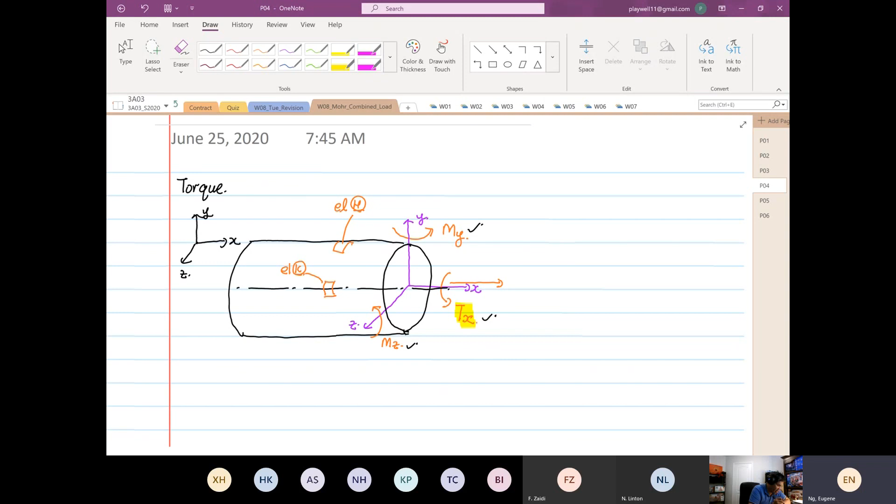So now I'm going to view our shaft from the plan view, okay. So we are going to look at X, and then we are going to look at Z. So we are going to look from the top. So this is our shaft. Right. So this will be our element H. And over here will be our element K.

And if we look at TX, okay, so this is where our TX is, right? If we look at TX from the plan view, the TX looks like this, right? If you use the right-hand rule, you look at the top, it's going down that direction.

Now, question for you. When you have a shaft under torsion, under rotation, when will the shaft break? Anyone? When will the shaft break due to torsion? Will it break during rotating, or will it break when you're trying to stop it? Anyone? When you're trying to stop it. Well done. Why? You're right. You are absolutely right.

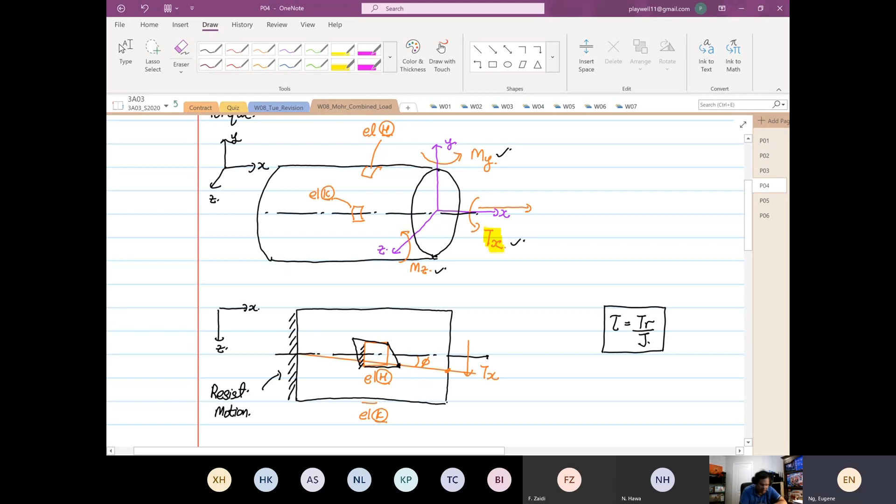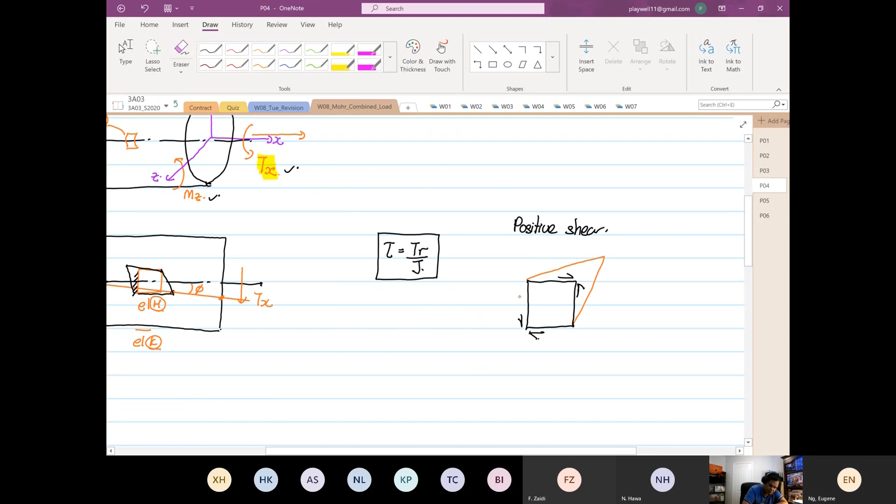So when the element is distorted that way, like what we have learned, is it positive shear or negative shear? So I'll draw for you the difference. So positive shear, right? So this is your element. So this is positive shear configuration, positive shear deformation. Then when you look at negative shear, right, the element goes opposite.

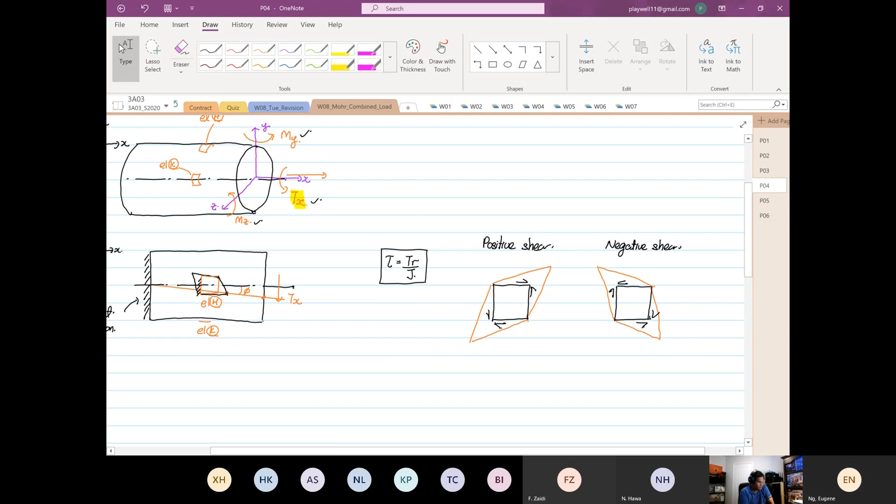So if you look at how our structure is deformed now, is it positive shear or negative shear? Anyone? It is what? So if you look at this pattern over here, this pattern I've drawn, maybe it's not very obvious. If you look at this pattern that I'm going over, it is known as what? So it's definitely not positive. So this is under what? Negative shear, right? Okay. So you look at this portion over here, it's the same, yes or no? Or the other end. So this is what we call negative shear.

Now, if you design structures that are homogeneous or isotropic, same strength in all directions, you'll be fine in terms of whether it is positive shear or negative shear; you don't really care. But if you are designing a shaft that has unidirectional strength, for example carbon fiber, it is important to know whether it is positive or negative shear.

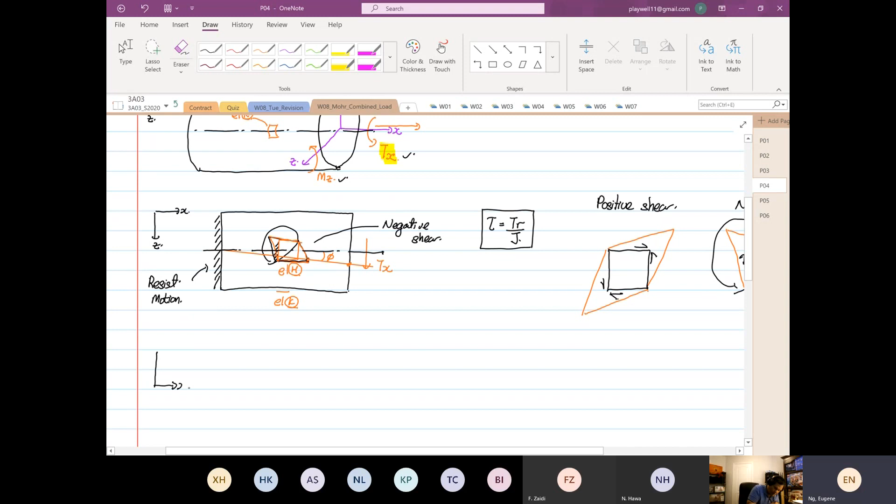So now, based on the same orientation, same applied stress, we look at this shaft now. So now we are viewing it from the top, at the plan view, to view X and Y. So now I want to see X and Y, and this is my rotation about Z now. Okay, so you still see the same thing. So now your element H is up here, and over here, this is your element K, right? And TX is still coming down.

So as I mentioned earlier, you only get stress when you resist motion, right? So if you look at how the element will deform, this part will want to come down here. So whether it is element H or element K, it is both going to be what? Negative shear. It will only become positive shear when what happens? So element H and element K will have positive shear if the torque is in the opposite direction.

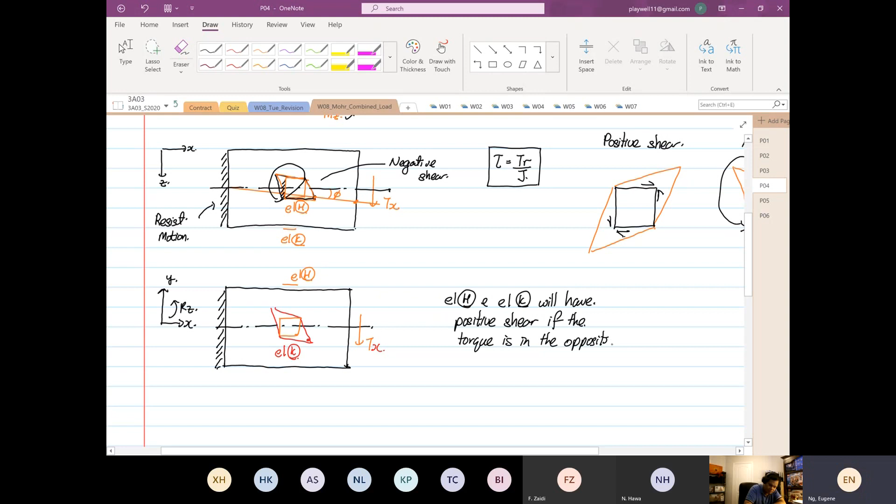So what do I mean by this? Let me elaborate. So now, again, it's been locked. This is our shaft. Now, TX goes opposite. So the deformation will look like this now. It wants to go this way now, for either element H or element K. So when that's the case, this is then classified as what? Positive shear. So that's why when we design a shaft with carbon fiber, it was meant to rotate in one direction only. If you reverse the direction, the strength is no more the same. So that is what you see when you design shafts.

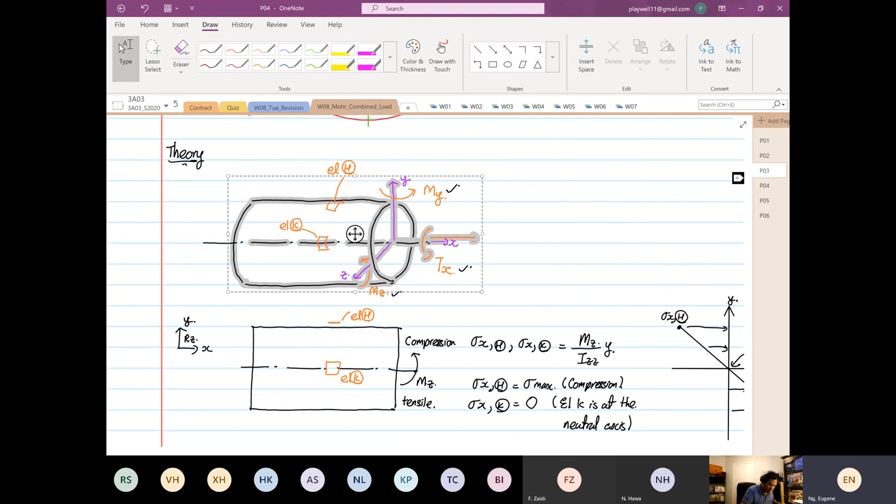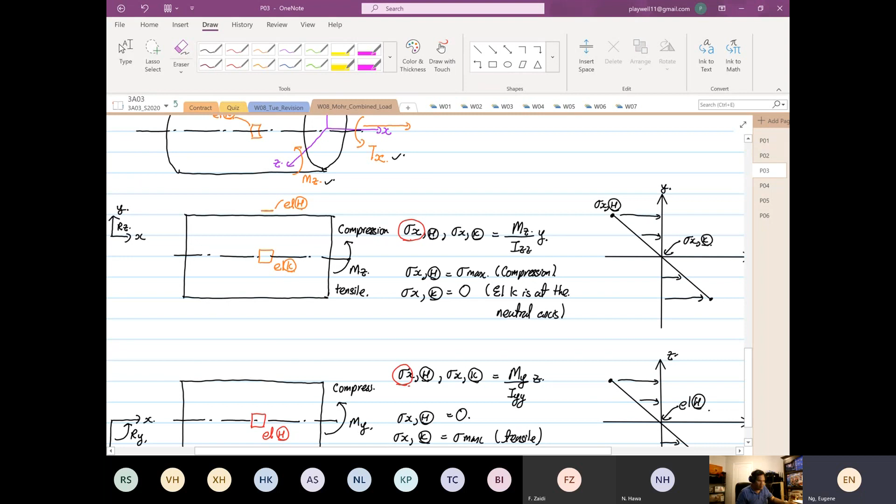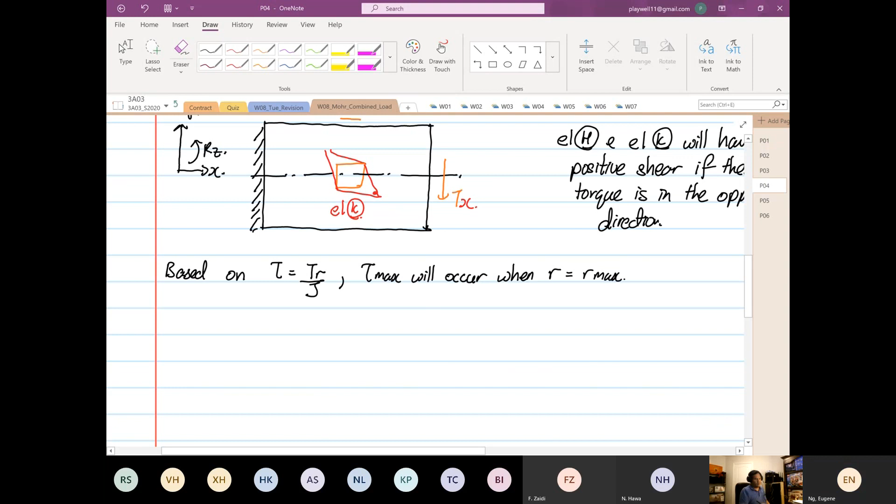Okay, now, so we have been through bending moment, moment about Y, moment about Z. What we realize about moment about Y or moment about Z for this case, all our directions are in stress X. And then we have our shear. Now, always remember, based on this formula, tau equals TR over J, the shear stress tau max will occur when R is at R max. The radius is at the R max.

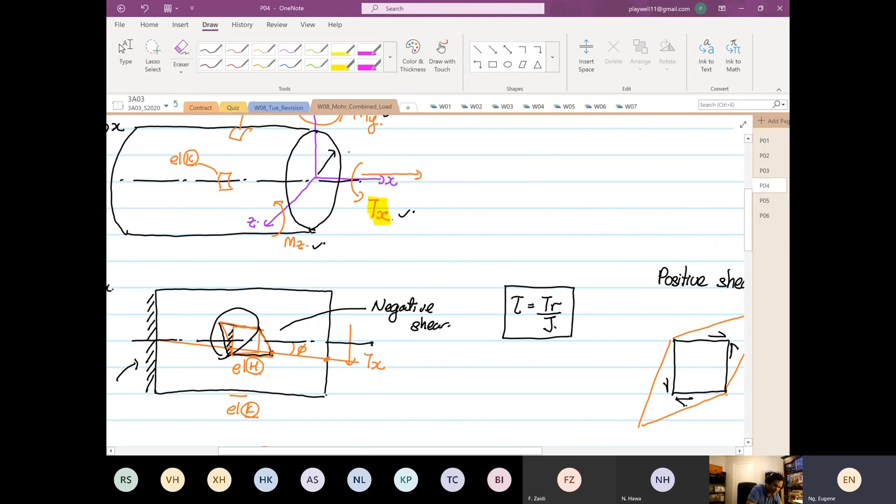So if we have a shaft over here, the radius is equal to a value known as C. So therefore, tau max will occur at TC over J, where C is the maximum radius of the shaft. So in shear, the maximum shear will occur at the surface. I repeat again, in terms of shear induced by torsion, the maximum shear will occur where the radius is the maximum. The shear has a distribution, right?

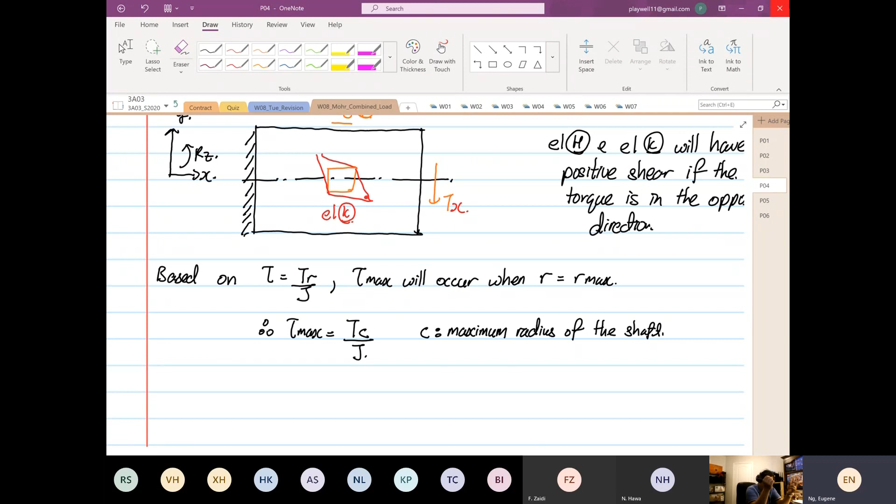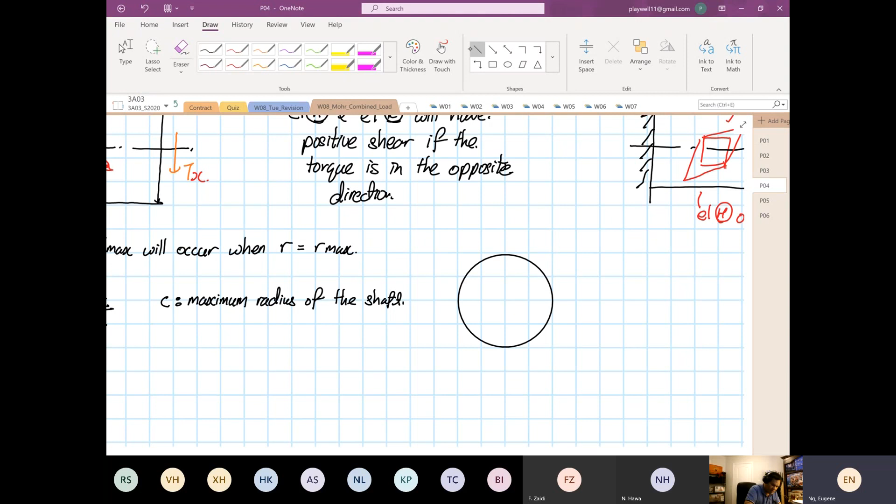This is interesting. So if I'm going to sketch now, this is the radius. Now this is the shaft, and then this is our center line. So based on here, I'll call this where my element H is, and this is where my element K is. So one is element H, the other one is my element K.

So now we're going to look at what will happen when this is under TX. So the distortion: if this thing has been locked, the point at element H will want to twist in this direction, yes or no? So this twist over here, like what